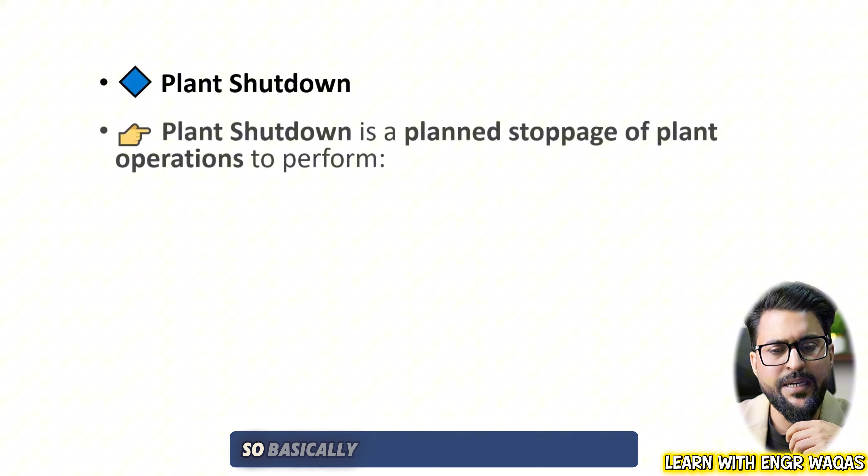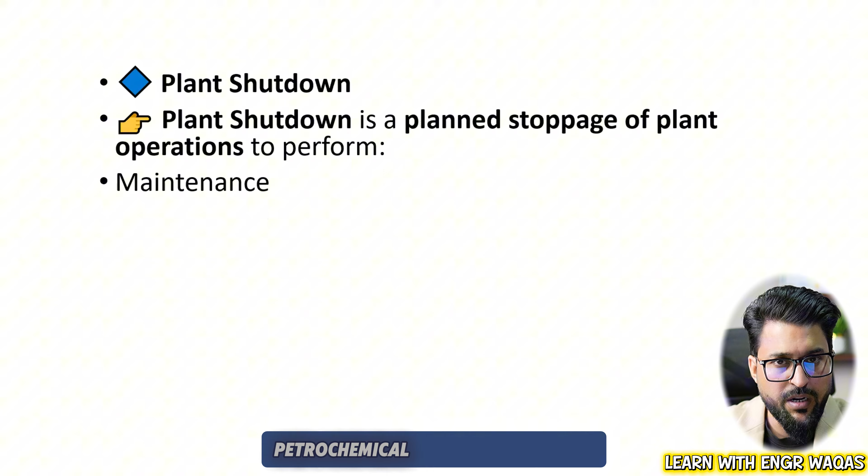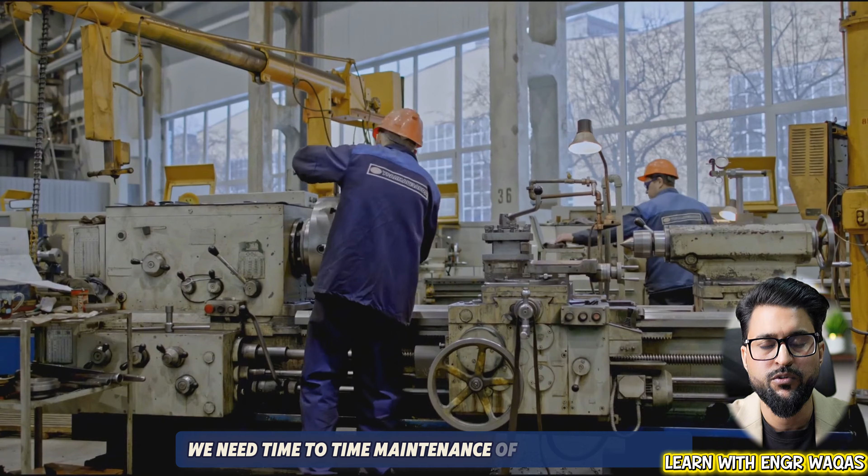Basically, plant shutdown is a planned stoppage of plant operations to perform maintenance. Like you are running a refinery, petrochemical industry, flour mill, or rice mill, there is heavy machinery working. So as per manufacturer recommendations, we need time to time maintenance of equipment operating in sequence, working as a team. So we need to stop this plant to perform maintenance of those respective equipments.

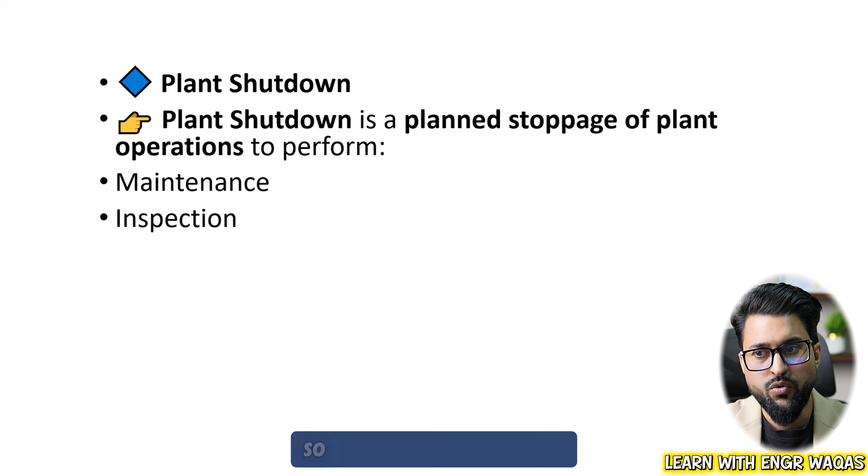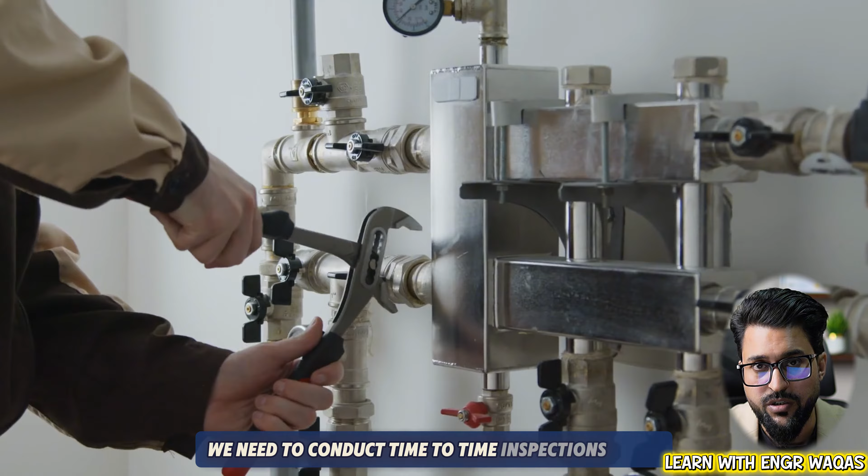We need to inspect them. Like piping, which is continuously under operation, due to erosion and corrosion many things can happen. So to avoid any serious hazard, we need to conduct time to time inspections, and then replace them if they are not up to the mark, if they don't fulfill our requirements as per industry standards. We need to replace or repair them.

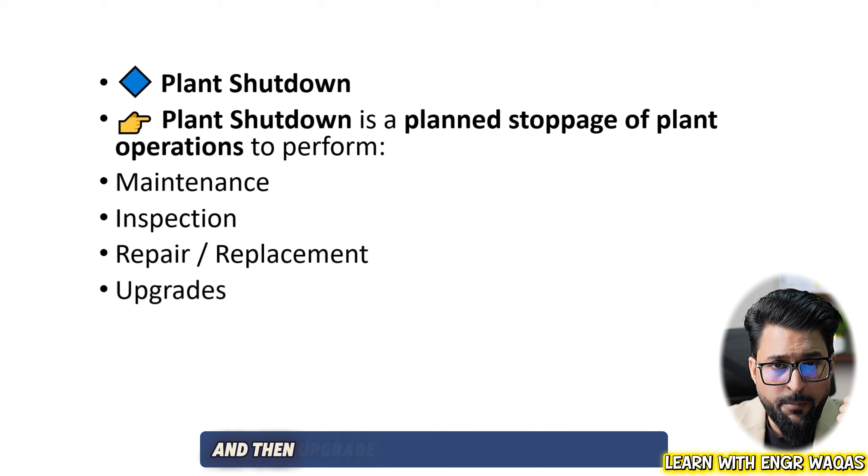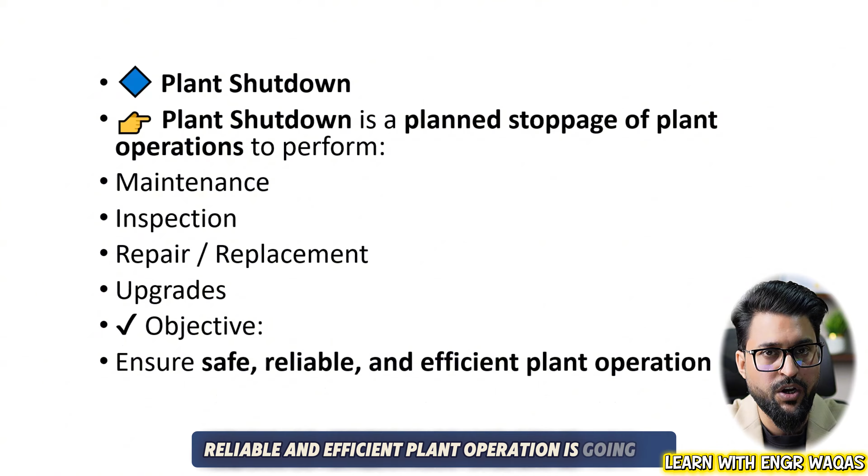If we need to upgrade them, yes, we are going to do that. The objective is to make sure the plant has a safe work environment, and reliable and efficient plant operation is going on - that is our major target. I hope you can understand what plant shutdown is and why we need to conduct it.

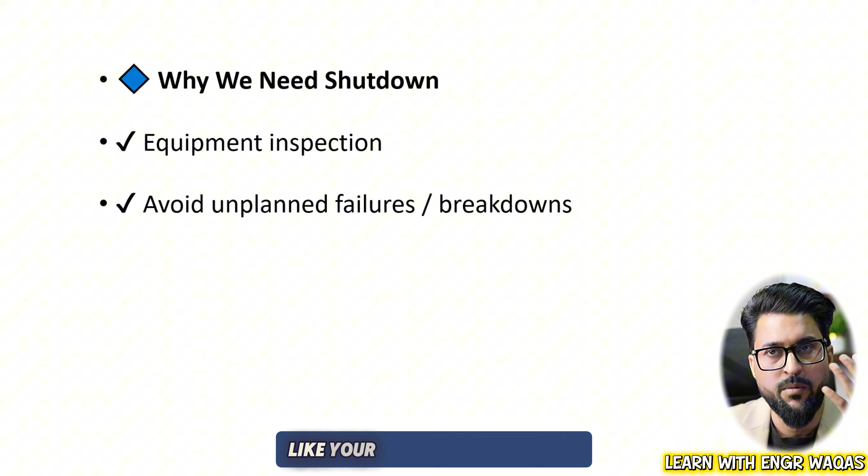Let's talk about equipment inspections, which I have already described. Avoid unplanned failures - like your operation is going on, you are in the middle of production, but suddenly your pump is not working properly, your turbine blade is not working properly, or your piping bursts out. What will happen? What are the outcomes?

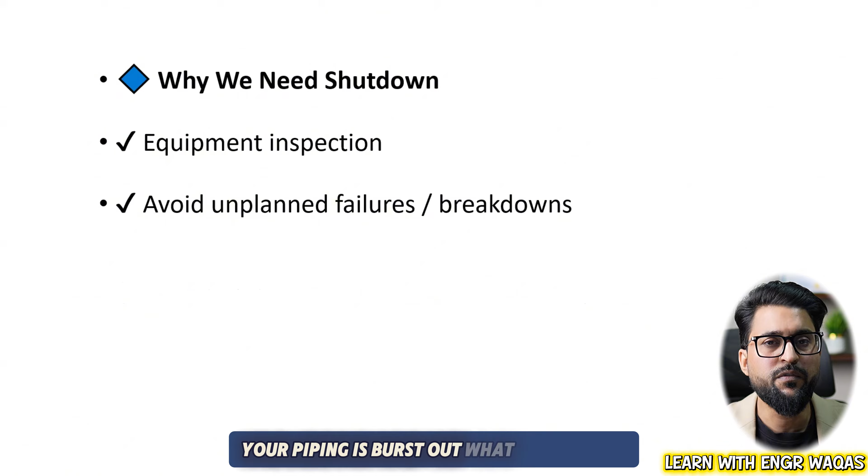To avoid these kinds of things, you need to make sure about safety compliance and improve efficiency - that is every company's target, to enhance efficiency every year. That is why we need to stop the plant and perform maintenance. We need to conduct inspections and check the quality of our processes and procedures.

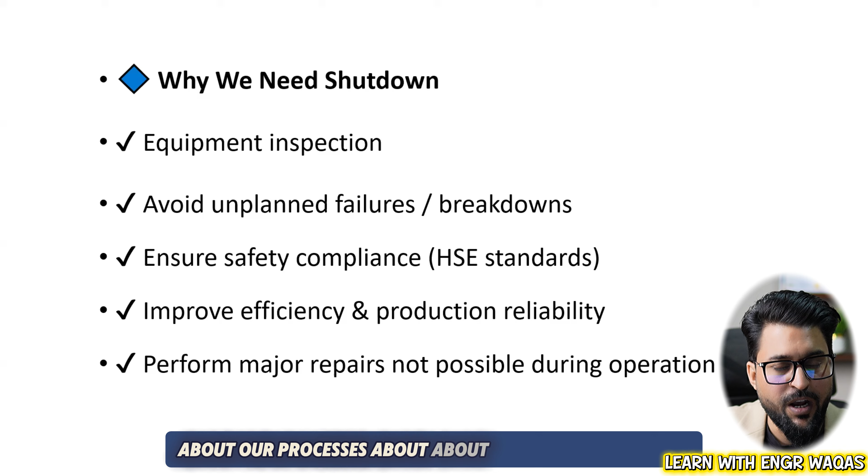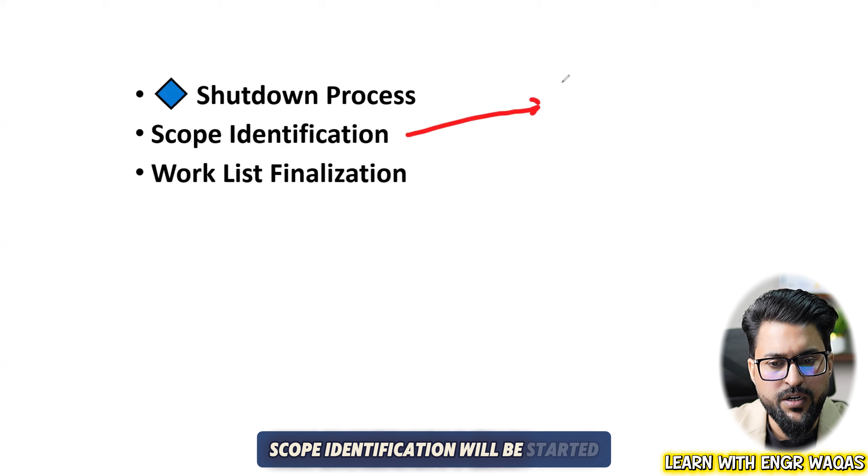Now let's talk about the shutdown process itself. There are three stages of this complete shutdown process: scope identification, let me identify this one; and work list finalization - how it is going to start. Let's take a real industry based example. Scope identification will be started 12 months before the shutdown is going to initiate in execution.

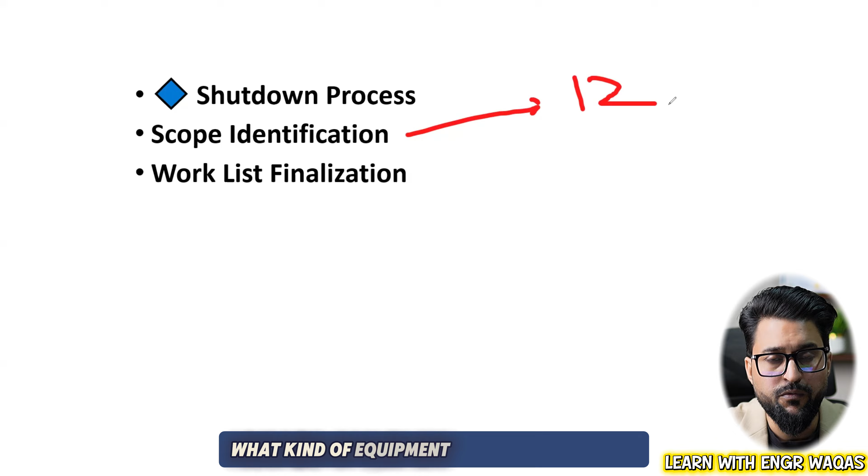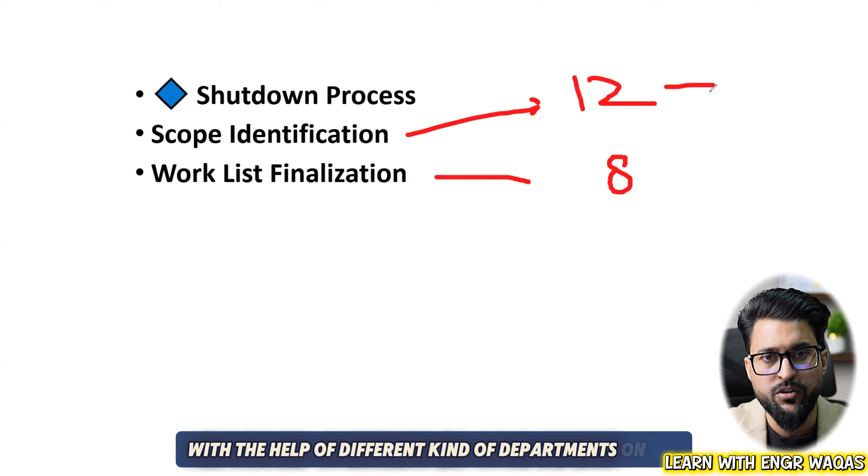So 1 year before, we are going to start documenting what kind of equipment we need to maintain during that shutdown - 12 months before. Then 8 months before, we make another exercise for work list finalization. We call them cutoff dates. There is the first initial cutoff date where we consider, with the help of different departments based on their work orders and reporting, maybe 10 equipments. After 8 months, maybe there are 7.

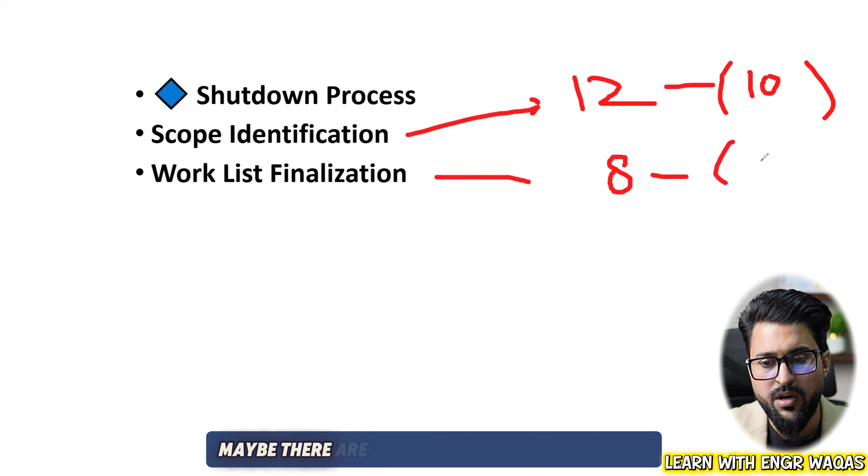After finalization, this is the second cutoff date, 8 months before that shutdown. And then finally, we have planning and scheduling. This is going to happen 3 months before. This is the final cutoff date.

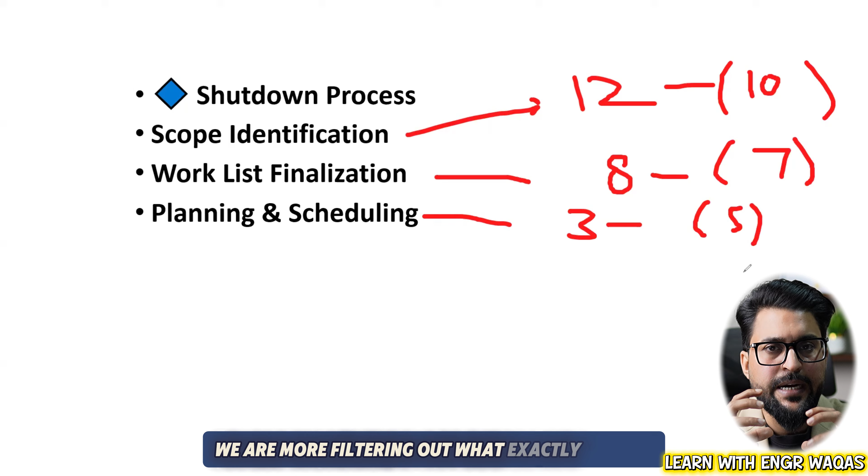Now in this, we have the final 5 equipments. We are filtering out what exactly is serious. There are things we can maintain on time, and there are things we can postpone for shutdown. So we are going to filter out our data.

So planning and scheduling, this is called core planning, where we need this data. This is the final data where we are going to add into the planning and scheduling of shutdown, right? So that is going to happen there. And then after this one,

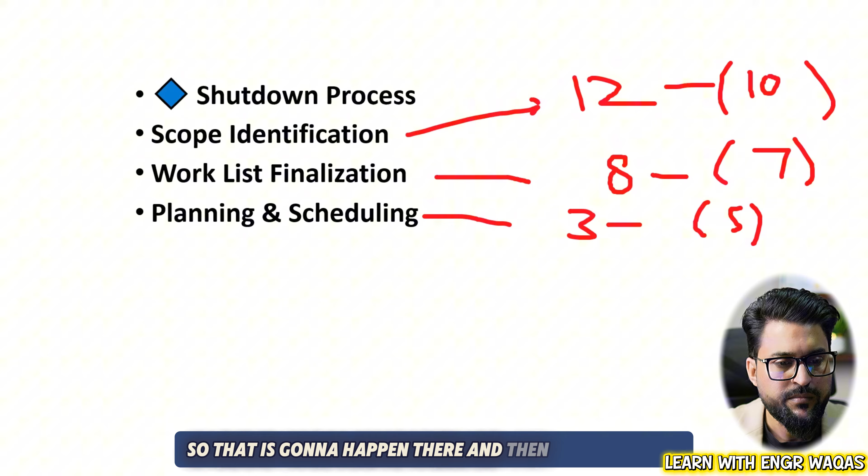there is resource mobilization. Once our schedule is developed, now we have to allocate our resources. This is level 4 planning. In planning and scheduling, that is our planning, that is level 3, in which we are going to develop our critical path method.

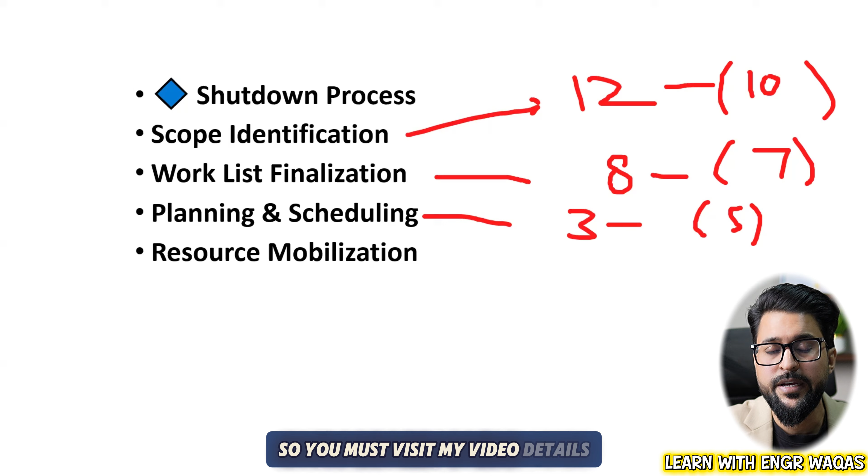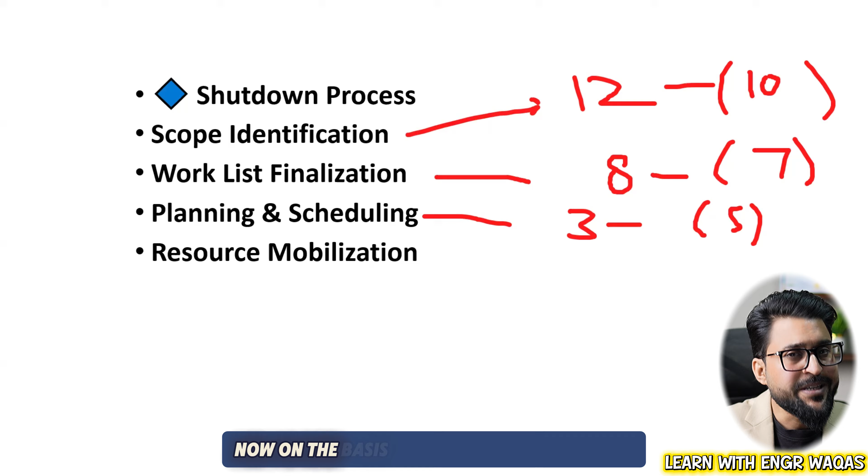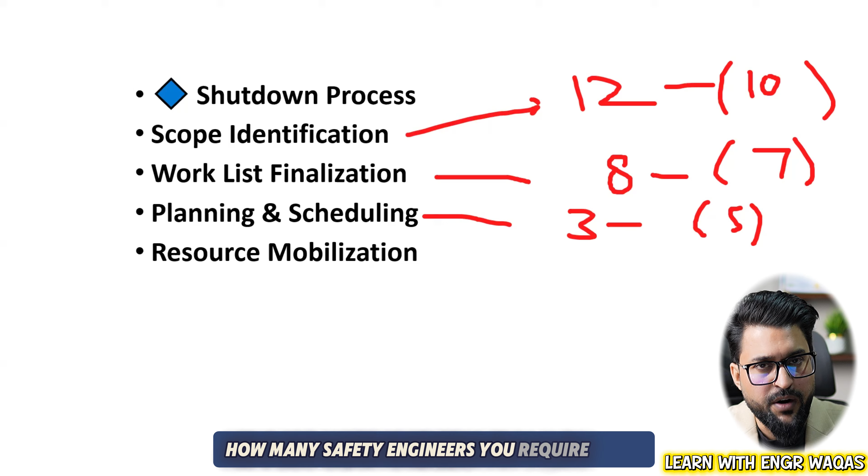So resource mobilization is actually level 4 planning, where your plan is ready. Now you are going to identify your shutdown is based on 25 days. On the basis of these 25 days shutdown, how many welders you require, how many technicians you require, how many fitters you require, how many safety engineers you require, right? So that is resource identification and resource mobilization.

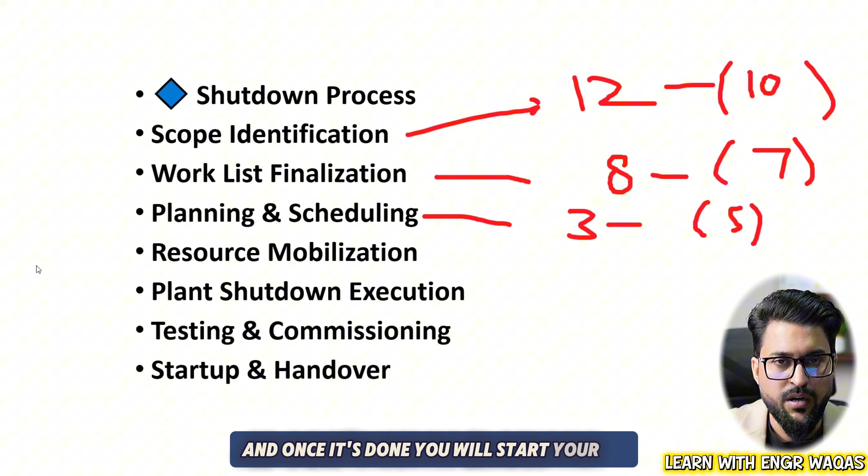You are going to get into your execution, actually, resource mobilization. But along with that resource mobilization, there is resource allocation, that is your level 4 planning. And then, of course, after resource mobilization, your execution is going to start up, and you are going to start testing and commissioning and all that. And once it's done, you will start your plant once again and hand over it to the client and whatever authority is there. So that is the shutdown process.

Now, departments which are involved in this shutdown, very important thing for you people to understand. Either that is a refinery, that is your production plant, that is your petrochemical industry, cement industry, your flour mill, or any other industry where heavy equipment is working. So you can realize the departments which are part of that industry are the operation department.

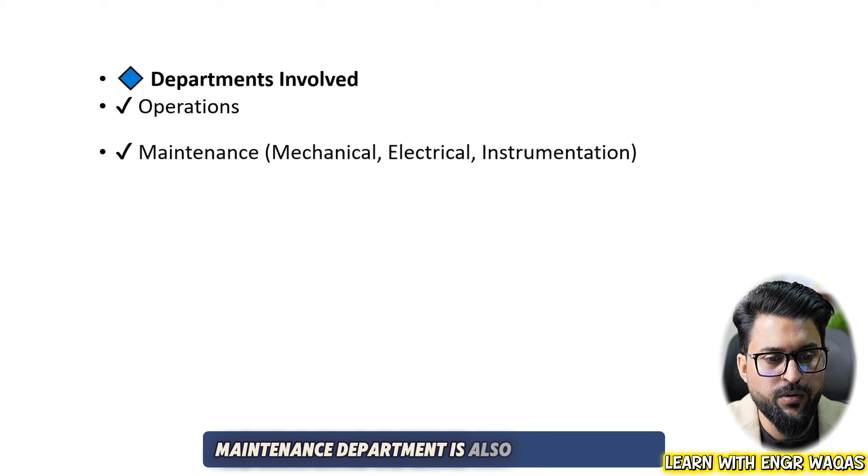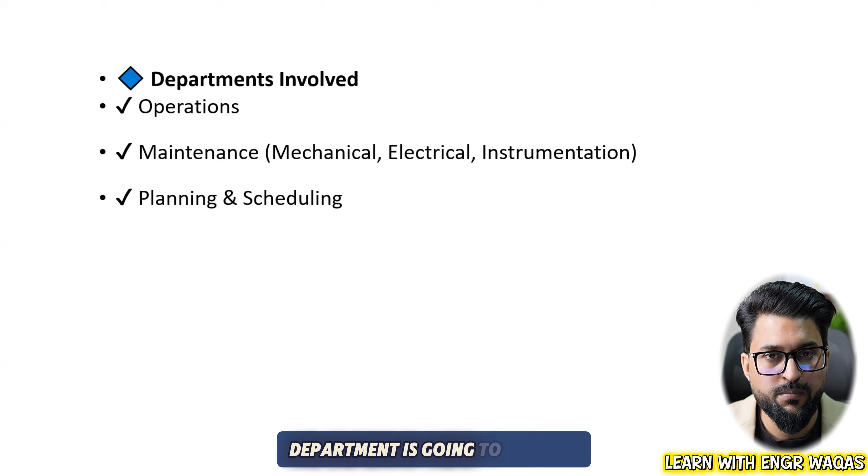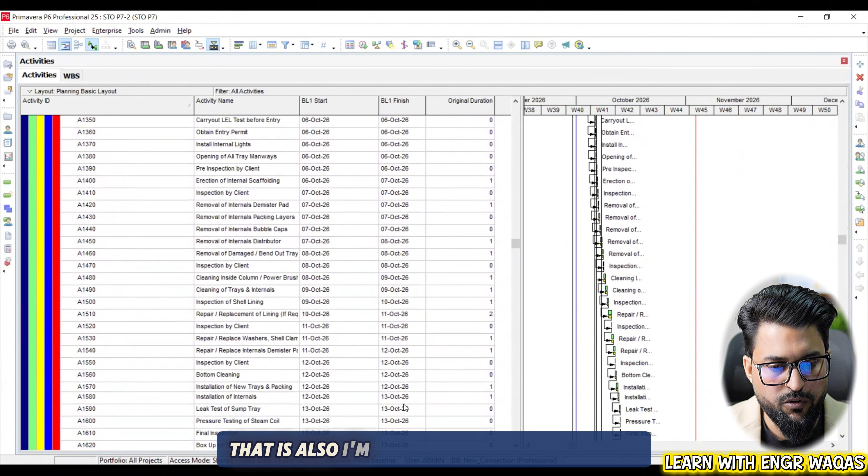So every other person is going to follow this document, but from where you are going to get this information, that is also I'm going to explain step by step. So planning scheduling department is there.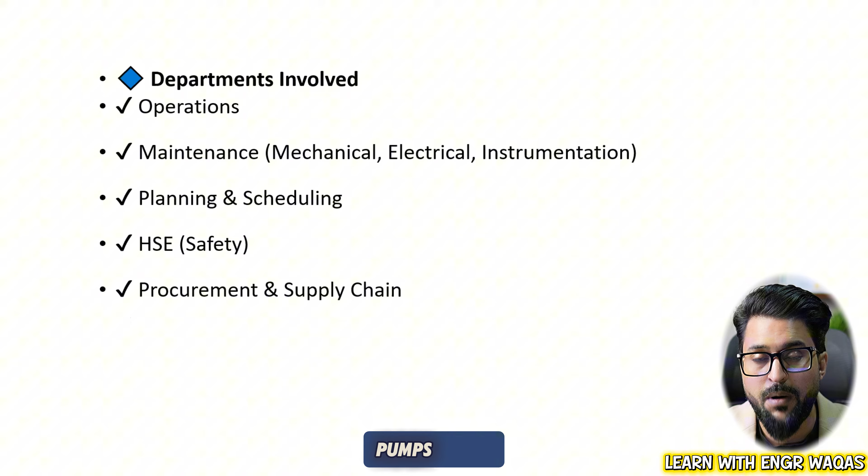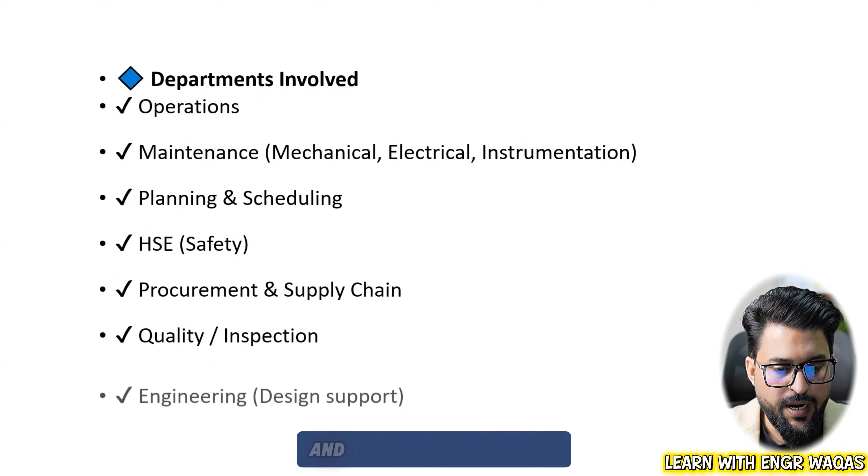HSE department is going to take care about the right tools being used inside that maintenance, right environment, safety, zero accidents, and procurement and supply chain. Like material should be available: gaskets, pumps, piping, elbows, spools. Then quality inspection people will be there who are going to make sure that certain equipment is as per the standard or not. And engineering, like design, if we need to add anything, of course we need to amend or modify that design. So as per that concern, we need the designing department as well. So that includes contractors and vendors as well.

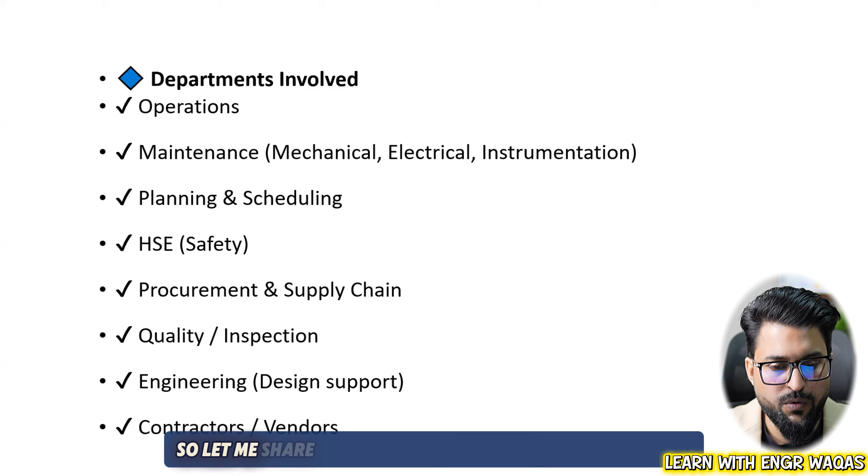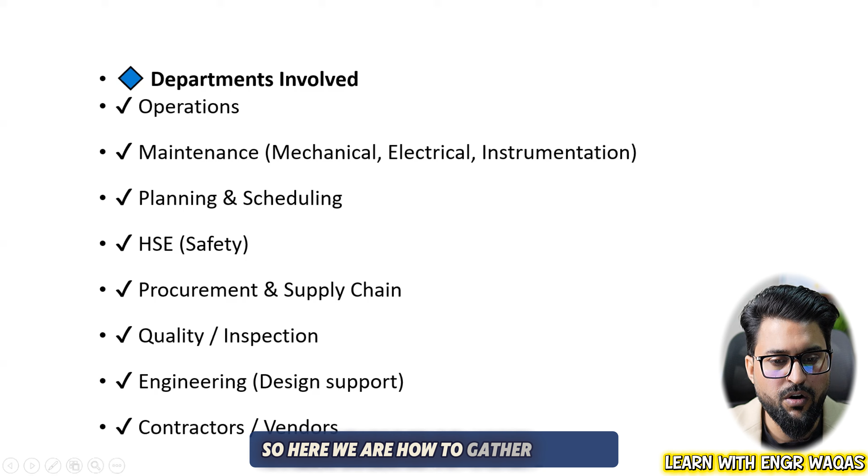So let me share with you one very important flowchart diagram which is going to help us understand exactly how to gather that data. So here we are, how to gather all this before compiling this complete project planning and scheduling for that plant shutdown on Primavera P6.

How we are going to gather that data over the period of these 3 cutoff dates, like 12 months before, 8 months before, and 3 months before, finally preparation of planning and scheduling on Primavera P6. So that is a very important thing.

Process department, inspection department, reliability department, operation department, planning, maintenance, and supply chain or material department, warehouse - all these departments are going to obtain approved WBS and provide turnaround or shutdown revision number to all departments. They create defect notifications with these details and send all plan job lists to planning sections.

They are going to share all these templates with the concerning departments. Now all these concerning departments are going to come at a single point where they create a common plan for work orders over the period of the timeline for that shutdown and get approval for it. This happens like 12 months before.

This is the first cutoff date. Now they consolidate all notification work order lists and make sure about that. This happens like 8 months before the shutdown.

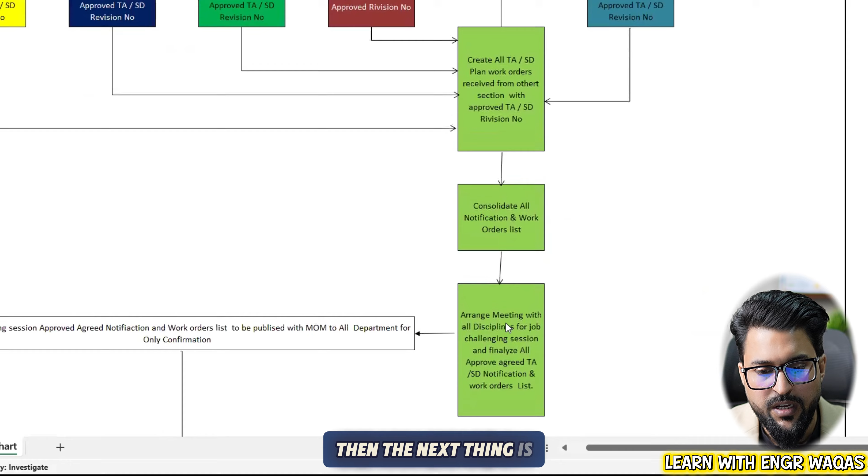Then the next thing is arranging a meeting with all disciplines for job challenging sessions and finalizing all approved, agreed turnaround or shutdown notification work order list.

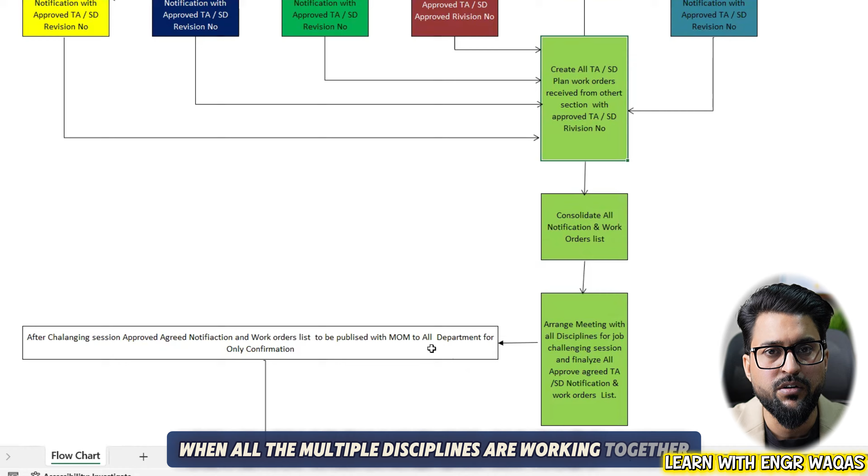Now all these departments sit around the table in a meeting and discuss the approved, agreed notification work order list after challenging sessions. Because when multiple disciplines are working together in meetings, there are many conflicts and disagreements that need to be addressed - that's also part of this.

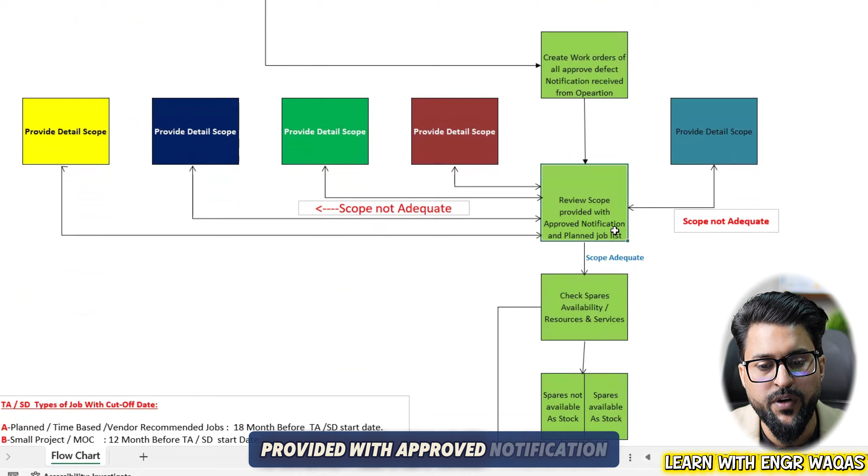So work orders are created for all approved defect notifications received from operations right after this meeting. After that, you finally review the scope provided with the approved notification and planned job list. You get that data and provide detailed scope - these departments provide their detailed scope after the meeting.

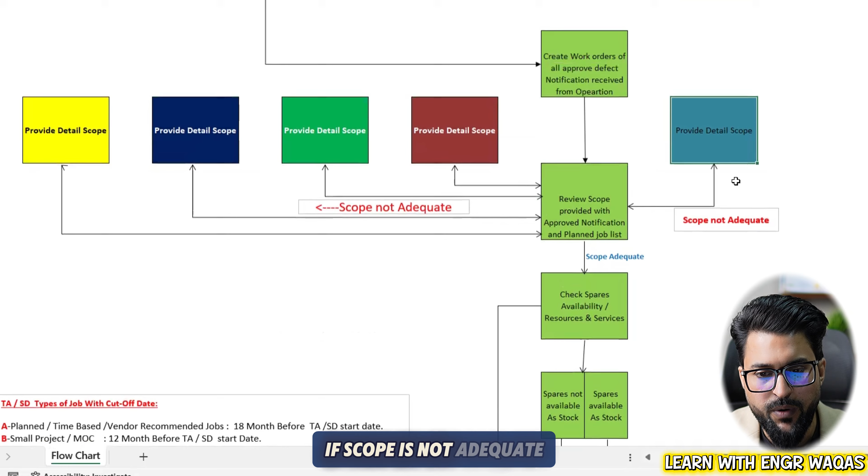And after that, check if the scope is adequate. If the scope is not adequate, you go back to those departments again. Right after this, check spare availability. Now scope is done, just 8 months before - the third cutoff date.

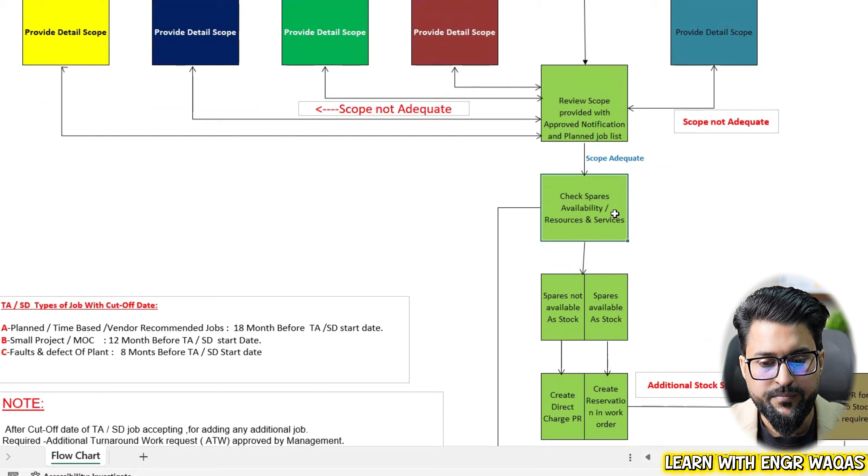Now you have to check material availability, so you get two statuses: spares or material is adequate, or material is not adequate. If the material is not available, you create a direct charge. If the material is available, you make work orders and additional stock spare is required.

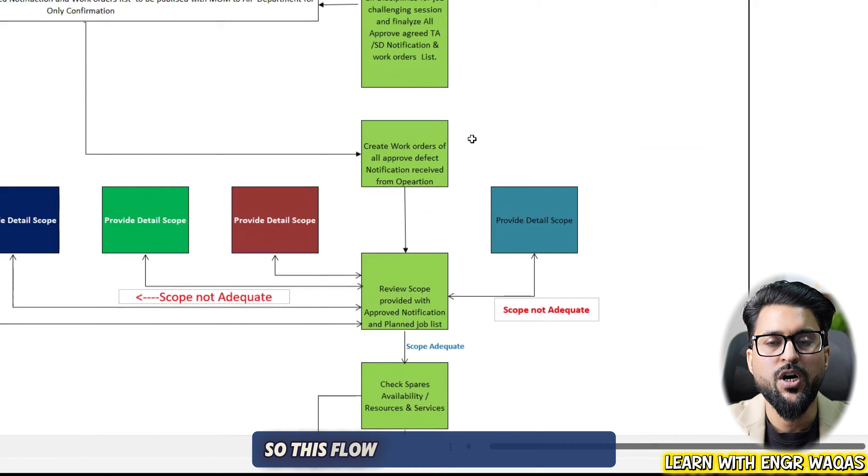You follow this sequence: create purchase order, procurement for additional stock spare required, arrange all spare parts, and create service - creating resources and so on. This flow chart is very important for how the process will be conducted.

If you are the one really getting into project planning and scheduling, and you want to go further in plant shutdown, operation management, on the managerial side, you want to start with scheduling and planning. That is a really high rewarding job career, more than any other job career.

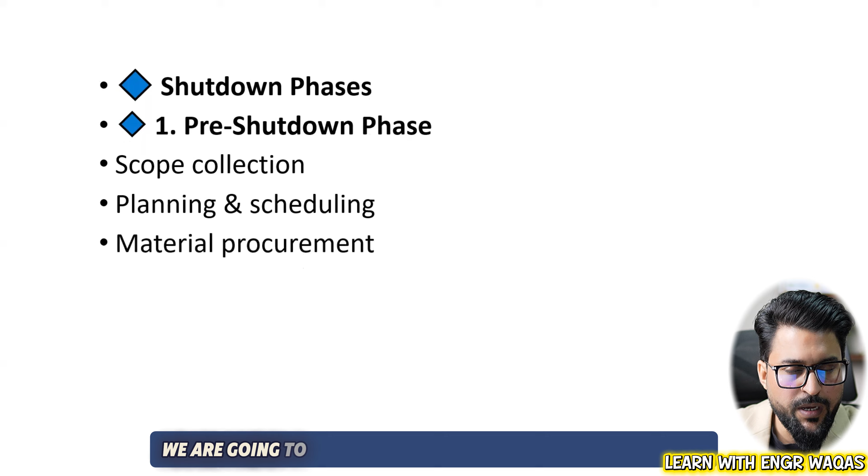We make strategy for planning and scheduling. We make material procurement arrangements, method statements - how we are going to conduct certain steps to replace pumps, their welding, their fabrication on-site area.

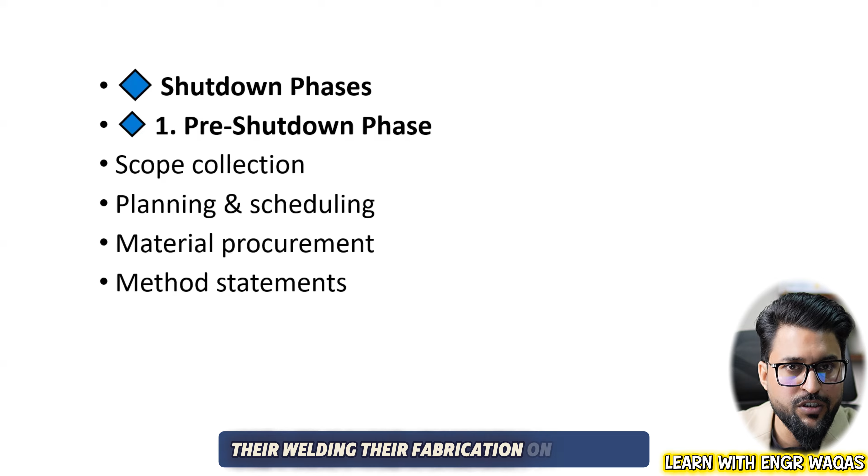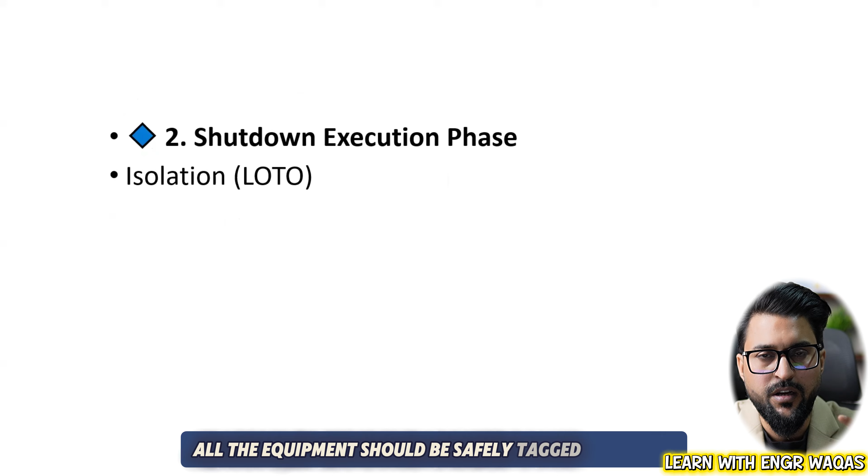Then there is shutdown, when real shutdown maintenance work is in action. First of all, isolation, lockout, tagout - all equipment should be safely tagged with that LOTO status, like this is checked out and we have properly isolated this equipment. This is so important for shutdown.

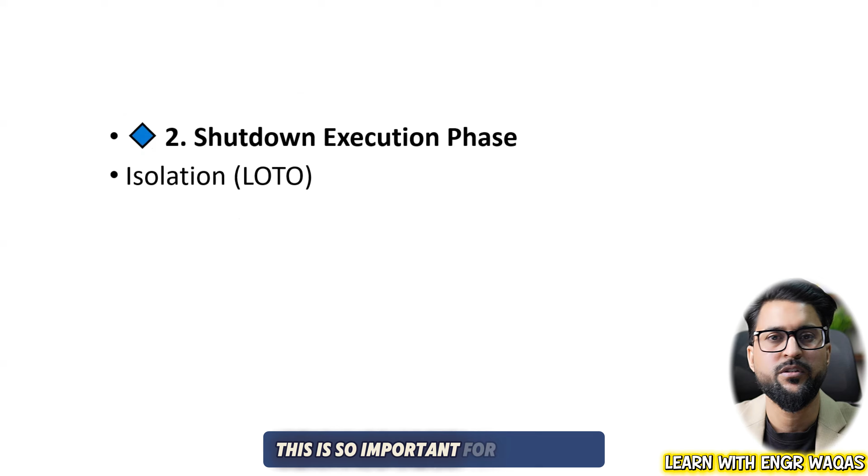So isolation will be there, that equipment, that boiler, that input output should be shut down. That should be completely isolated. And maintenance activities and then inspections right after those activities. And then this is actually complete shutdown.

Right after this, post shutdown, when you are going to test and reinstatement, you are going to restart your plant for the same functionality, and commissioning is there, to start up your plant for producing the same purpose. So these are the major phases.

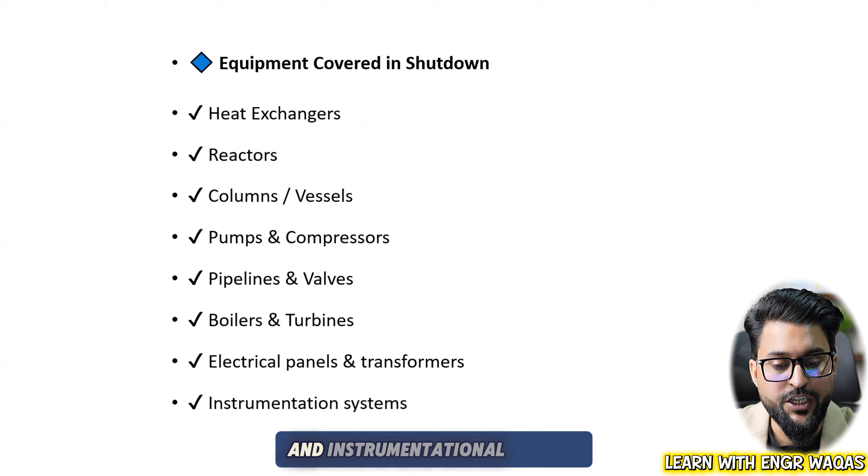Now, what kind of equipment do we need to handle in our oil and gas industry? Usually there are heat exchangers, reactors, columns, pumps, pipelines, boilers, electrical panels, and instrumentation systems. Let me share a few of these with you.

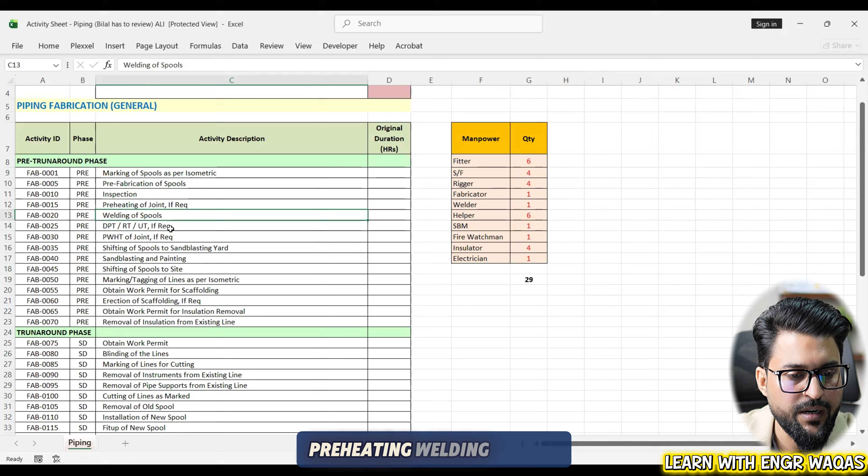See, this is piping, and this is pre-shutdown. All the activities you go through, like marking of spools, prefabrication, inspection, preheating, welding. And in shutdown, you get permit to work, blinding of the lines, marking of lines for cutting, removal of instrumentation, and so on. These are the activities we gather through the flow chart I was explaining. This data will be maintained in Excel, and we are going to get that data into Primavera P6.

Right after this, there is one column which is very popular, equipment. In columns, you can see the dimensions: height of column is 25 meters, 3 meter, 12 number of trays, 6 number of manholes, and number of beds of Paul rings. See their respective activities.

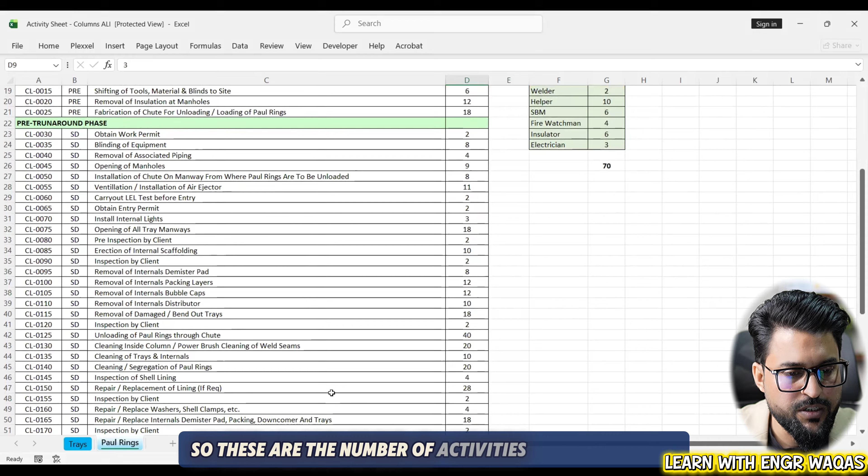So these are the number of activities you are going to get from different kinds of departments. You can define them, make their sequence, and maintain them in Excel before getting them into Primavera P6. In Primavera P6, you can see you make it pre-shutdown, shutdown, and post-shutdown.

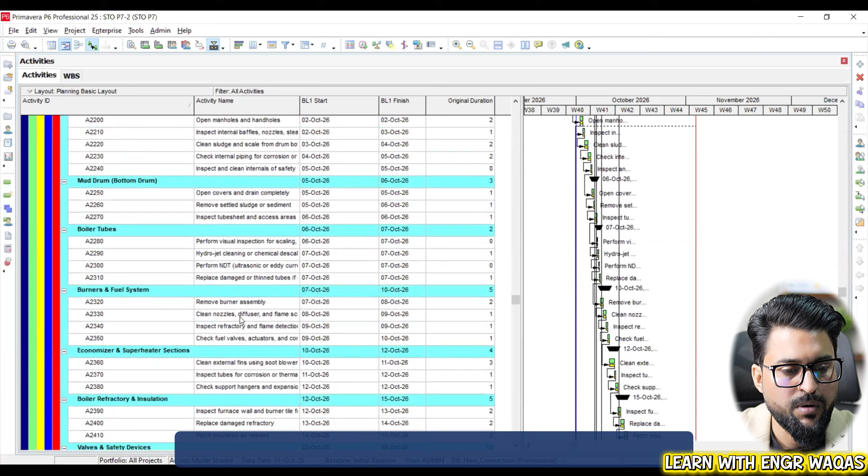The detailing is there in activities, column activities are there, and finally you can see boiler activities: steam drum, mud drum, boiler tubes, burners. If you are actually dealing with such kind of maintenance, you are working in safety, as a technician, or as a supervisor.

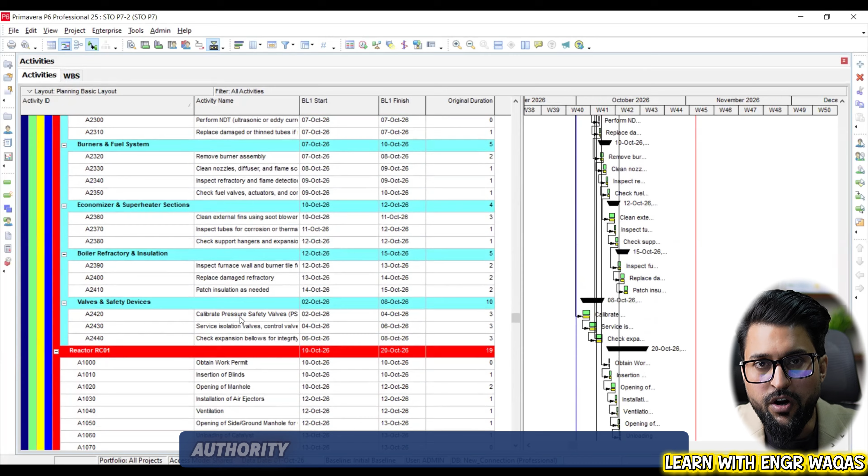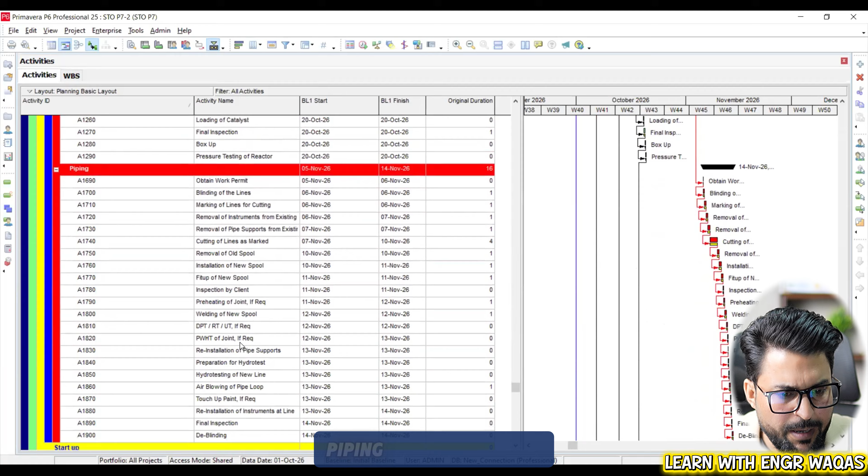So these are different kinds of activities in Primavera P6. You can see boiler is there, reactor equipment is there, piping. In another video, I will be explaining these things separately, but right now I'm giving you an overall overview.

So that is how planning engineers, if you are going to join this industry - oil and gas industry, refinery, petrochemical industry, flour mill, rice mill, cement industry, anything where heavy equipment is working - they need planning engineers, they need scheduling engineers, so that these engineers start working a way time ahead, like 1 year before that shutdown, just to take care about the efficiency.

On the basis of this document, they are going to develop the efficiency. The shutdown will be done, will be followed properly, zero accident. They are going to make sure the teamwork will be there, right time, right tool, right resources, right material should be available, because these project planning scheduling documents are going to develop that kind of strategy which helps us evaluate pre-time arrangements.